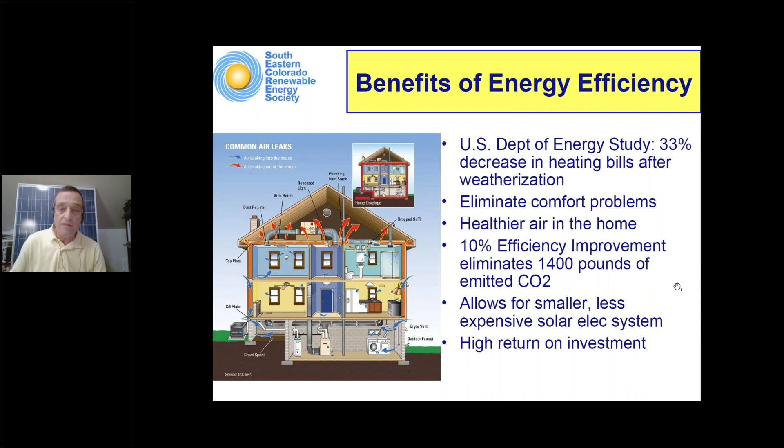But for the purpose of tonight's briefing, one of the more important aspects is improving the efficiency of your home or business is always the first step before you consider adding renewable energy such as solar. The less energy that you're using through efficiency measures, the smaller the system that you have to install and the less expensive it will be.

So in the typical house, where does all your energy go? This is information from the U.S. Energy Information Administration. It's about 2 years old, and this is data for across the entire United States.

The largest percentage goes to space heating, about 43%. You can see a fairly large chunk down there in the bottom in orange for water heat. And then that large blue section, 21%, is the all other. That all other includes appliances and plug loads, and that's a category that's growing fairly rapidly as people add many consumer electronics into their household.

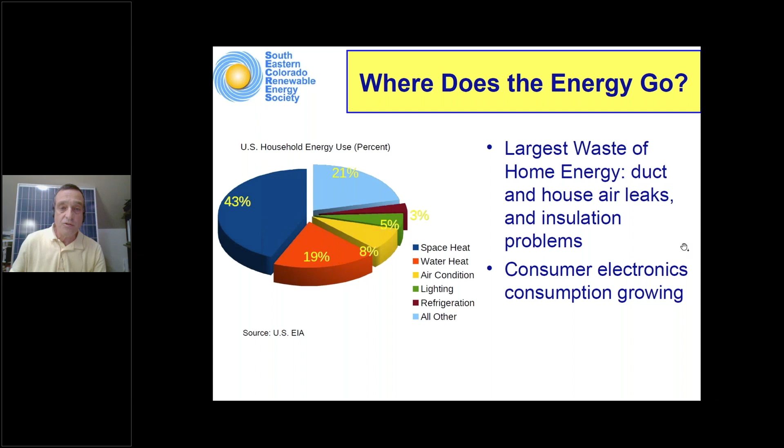So the first of a handful of very important points I'd like you to walk away with tonight is this. You cannot consider improving the efficiency of your building in isolation without understanding the interrelationship between efficiency, health, comfort, and safety. It is possible to improve in one area and inadvertently cause a problem in another area.

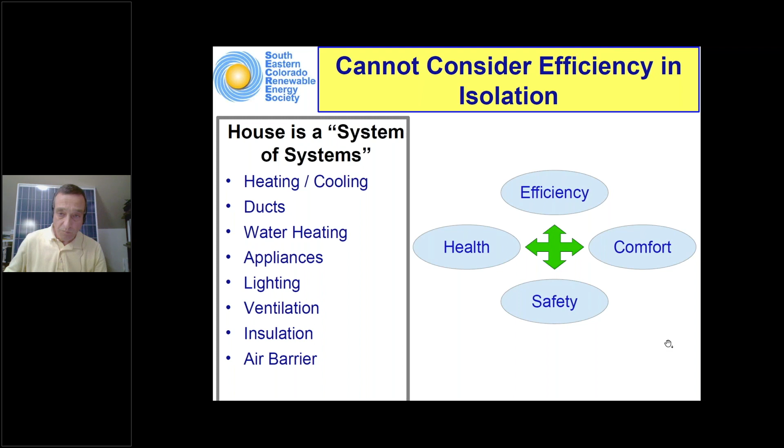Let me just give you one very common example. The recommendation is always to remove or reduce air leakage in a house, make your house or your building as tight as possible. But you can do that beyond a threshold point where if you don't add mechanical ventilation, you increase the risk of mold, mildew, and trapping off-gassing and moisture inside the house. So when you're considering improving the efficiency of your building, you have to look at health, comfort, and safety along with that.

Second key point, do not think just about insulation. In other words, put aside all of those commercials you've seen in the newspaper, on TV, on the radio, and think beyond just insulation to the concept of the thermal boundary. The thermal boundary is the shell around the conditioned portion of your building, of your living space or workspace. And there are two absolutely fundamental critical requirements that define a thermal boundary. It must be air sealed and it must be insulated.

And I want to make sure that I draw a distinction between air sealing and vapor sealing. An air barrier will allow water vapor to breathe, to pass through, but it will block the bulk movement of air through the shell. A vapor barrier, by contrast, blocks both air and water vapor. And we'll be talking about where you would use those different types of barriers, but in some cases, it can be rather detrimental to use a vapor barrier where you really need an air barrier.

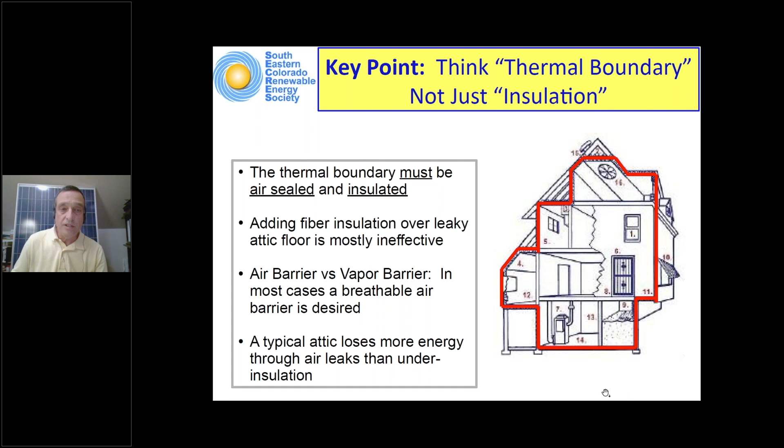So now let's take a look at what some of these common problems are. These are photos from a variety of energy audits that I've done over the years. So the first area is attics. The place to start before you even think about insulation is air sealing and looking for penetrations through the sides and particularly through the floor of the attic, which is the ceiling of the uppermost floor of the house. I'm just going to talk houses here, but these same concepts obviously apply to any building, including small businesses. So here are some common examples.

In the upper left, this is called a knee wall, and the definition of a knee wall is a vertical wall in the attic which has attic, namely outdoor space, on one side and conditioned indoor space on the other. It's only been recently, with the adoption of the current, actually two energy codes ago, but still fairly recent, that code requires the knee walls to be completely air sealed on, think of it as a box, all six sides: front, back, top, bottom, left, right.

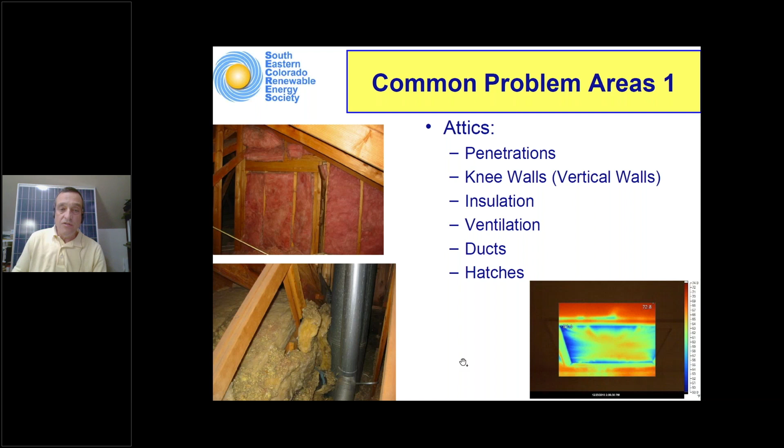One easy fix, well, let me start with the best solution. If you don't have to get up into the attic, or you only have to get up on very rare occasions for some type of maintenance, the best solution is just to run a bead of caulk around that door and just seal it in place. If you want to be able to get in and out of the attic, then you can put weather stripping on the lip and have the hatch actually sitting down onto that weather stripping. So that's the attic. Let's take a look at crawl spaces.

Through most of the 20th century, till about the late 70s or so, the conventional wisdom was to ventilate a crawl space. In other words, define the thermal boundary as the roof of the crawl space, which is the lowest floor in the house. What that meant is that the crawl space was outside space, and running plumbing and drains and electrical and other mechanicals through the crawl space put all of those mechanicals into outside space, which can lead to frozen pipes and other issues, because it's almost impossible to completely air seal a floor. So it led to a lot of air leakage and infiltration.

The unanimous recommendation today in the building science community is to bring the crawl space inside the thermal boundary: define the thermal boundary as the foundation walls of the crawl space, meaning insulate those, and bring the crawl space itself inside. That eliminates the problem with trying to completely air seal the floor above a crawl space with all of the pipes and wires and penetrations that go through it.

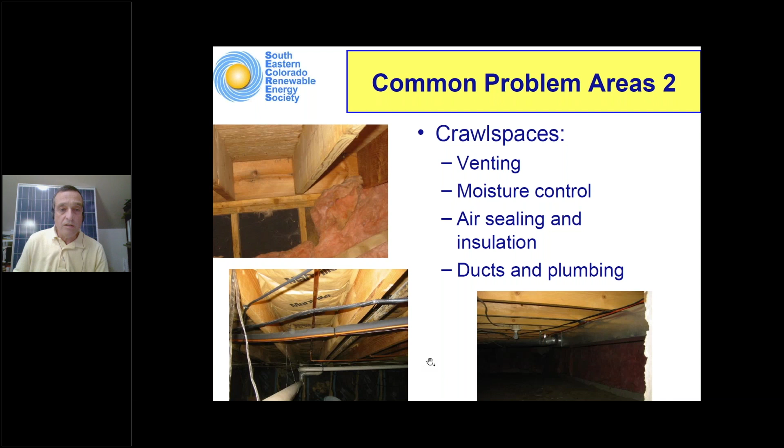Next common area, just miscellaneous air infiltration, air leakage. So again, this is only critical at the thermal boundary. So a recessed light, let's say between the first and the second floor, you don't care about air sealing that, because one side of that is not exposed to outside air.

But a recessed light on the uppermost floor, where there is attic above, which is outside space, is a notorious air leakage problem. Here in the lower right corner is a thermal image of a typical can light, recessed light with attic above. And there is a very inexpensive and easy DIY fix for this, and it does not require the can to be removed from the framing. It can all be done from inside the house. You don't have to go up in the attic.

And that is the purchase of an airtight LED kit from Lowe's or Home Depot. They're only about $16 a piece now. It'll pay for itself in one heating season. The light bulb comes out. The inner shroud, which is held in place with usually 3 springs, comes out, and the kit goes in, and the kit has a built-in LED light, and it also has a gasketed cover to stop the leakage of air from the attic.

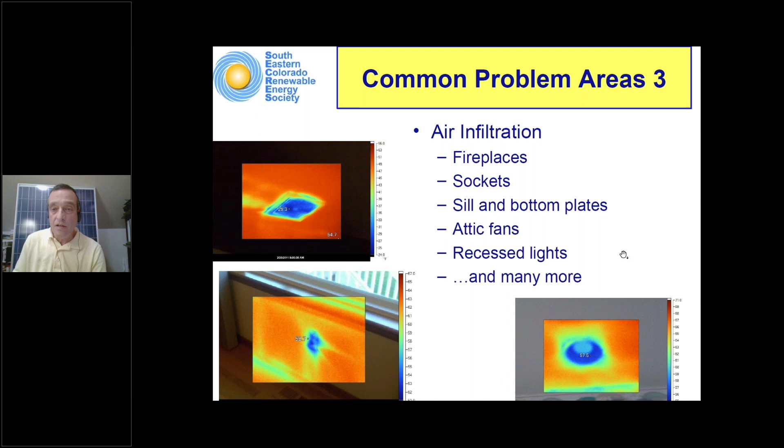Hidden problems are notorious and particularly difficult for an average homeowner to detect. And if you can't detect it, it's hard to correct it. But here are some examples. This is the upper left corner photo, thermal image of a bathroom wall in the wintertime. This was a gentleman that was having frozen pipes, but frozen pipes down in the basement. But this is the second floor bathroom. And as I went along with the thermal camera, each stud cavity was red, meaning warm, red, red, red, blue.

And what was happening here was below these lights were a sink and a plumbing vent stack, a plumbing vent pipe was going up through the outer wall and penetrating into the attic, and the gap between the pipe and the framing was not caulked or spray foamed. And so frigid winter attic air was pouring down through that gap into the wall cavity, and then down further, and freezing pipes in the house.

Lower left picture. This is a typical finding in our area where we have very high winds, where there are no cardboard or plastic baffles in the attic at the soffit vents. So the soffit vent is where a roof overhangs and there's a vent underneath. But inside the attic, there should be a baffle that forces the air coming in through the vent up and over the insulation.

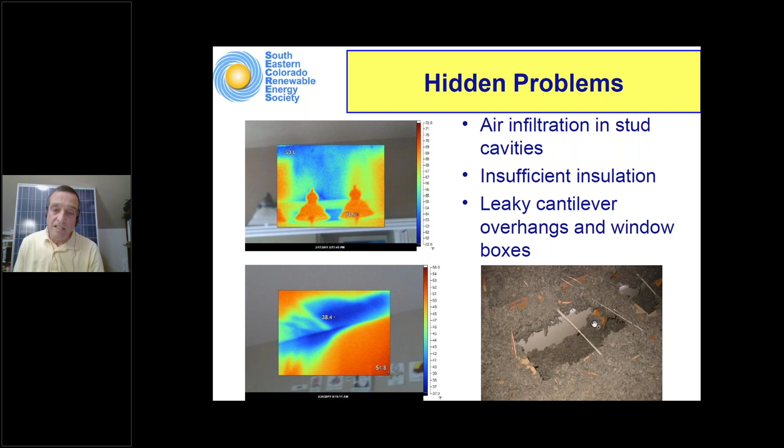Let's talk furnaces for a minute. You won't find many, but they still exist, and they really are cost-effective and high return on investment to replace, which is the 65% efficient furnace. You can tell these by the lower opening with a constant, steady, 24/7, 365-day per year pilot light burning. And the payback time to replace this with a modern furnace is actually fairly short, 3 to 5 years. You will save that much in energy.

What you're going to find most people putting in today, or putting in as a replacement when the original furnace dies, is the 92 to 98% efficient condensing furnace, where you not only have the primary heat from the flame, but you also condense the heat energy out of the flue gases, put that heat energy into the house, and so only cooler gases go out through a plastic pipe.

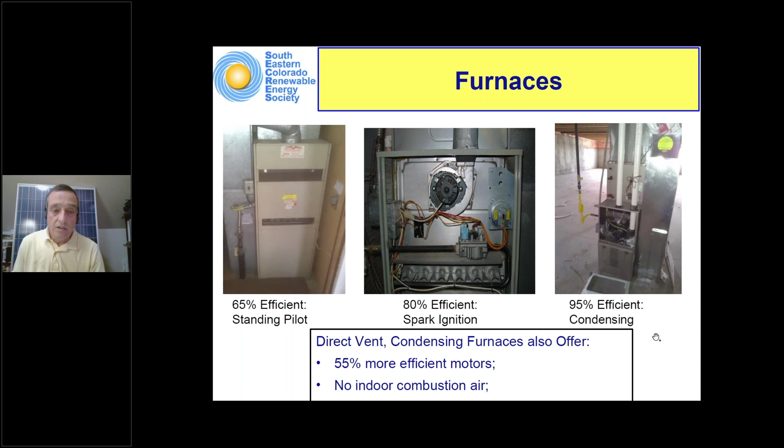So these are approximately 95% efficient. They go up to 98%. And they also have much higher efficiency electric motors called electronically commutated motors, ECM motors, in the modern furnaces.

Let's talk cooling for a little bit. We are blessed in our climate with relatively few cooling days, and also in the summer, nighttime with low humidity and low temperatures. So it's very hard to make an economic argument for investing a lot of money into highly efficient air conditioning for so few cooling days.

That's not to say that there won't be times where you need an air conditioner in a house, but the first step should always be to try to stop the source of the excess heat, which is usually solar heating coming into the house. So more cost effective than a larger and more expensive air conditioner is to look into things like thermal shades, or there are actually products called solar screens that provide very good visibility but block a lot of the solar heat energy, the infrared energy coming into the house.

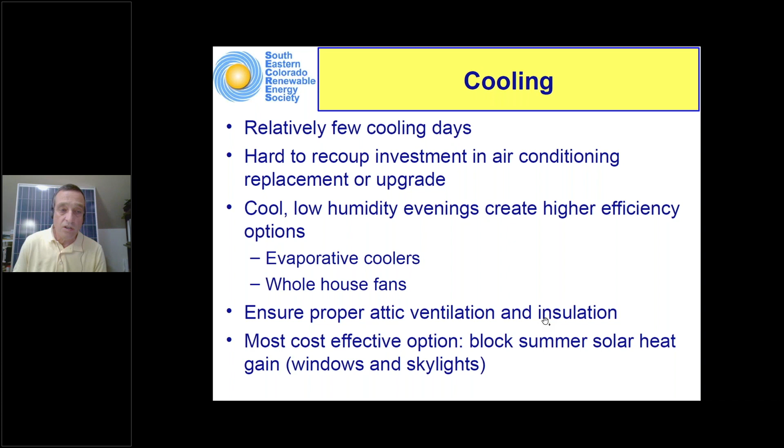Simply changing incandescent light bulbs to LED light bulbs eliminates a lot of heat in the house. But if you've done all that and you still need mechanical cooling, you have some options that work well in our climate that are more cost effective than air conditioners, and that's a whole house fan, which should sit up in the attic, and also evaporative coolers work very well the lower the humidity.

I mentioned earlier that appliance and plug loads are rising because of consumer electronics, but they're also dropping because of the Energy Star program, and appliances like refrigerators and dishwashers are actually becoming more efficient. In a typical U.S. house, the average electrical consumption per month is about 920 kilowatt hours. A moderately efficient family can get that down to 800 kilowatt hours per month. And if you're really focused, you can drop that all the way down to 300 to 400.

But one area that you really have to attack are these plug loads and appliances. And the best place to start is with Energy Star rated appliances.

Refrigerators were notorious, and they were the first product to be in the Energy Star program. In the early 1990s, a typical refrigerator used about 1,200 kilowatt hours per year. That average today, and this slide's a couple years old, is actually lower than 550. It's getting down around 500. And you can find good size refrigerators down in the 350 kilowatt hour per year range.

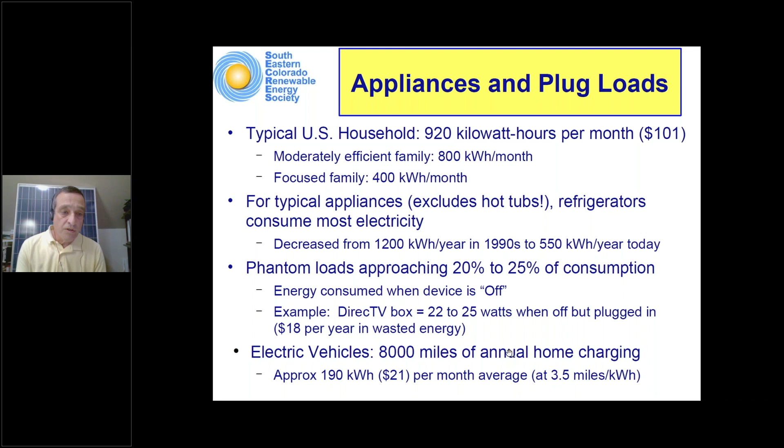Phantom loads. A phantom load is when the device switch says off, but it's still drawing electricity in the background. One of the most notorious examples I used to like to show customers were Comcast or DirecTV boxes. The switch said off, but in order to be ready, or in the case of DirecTV, to track satellites, in the background they were still drawing a fairly substantial 22 to 25 watts, and that is running 24 hours a day.

So what's the best thing to do? If you can live with a slightly longer warm-up time for your TV, just put these on a power strip with a switch, and when you're done for the night, turn it off. Kill the power to the box.

Let's talk electric vehicles just for a second, as those are becoming much more popular. What will that do to your plug loads? Let's take an example of 8,000 miles of home charging for a year, with a typical efficiency electric vehicle of 3.5 miles per kilowatt hour. You're going to consume about 190 kilowatt hours, or an additional $21 per month on average, to charge that electric vehicle. So far cheaper than gasoline, but it still comes as a shock to a lot of people when they get that first energy bill after buying an electric vehicle.